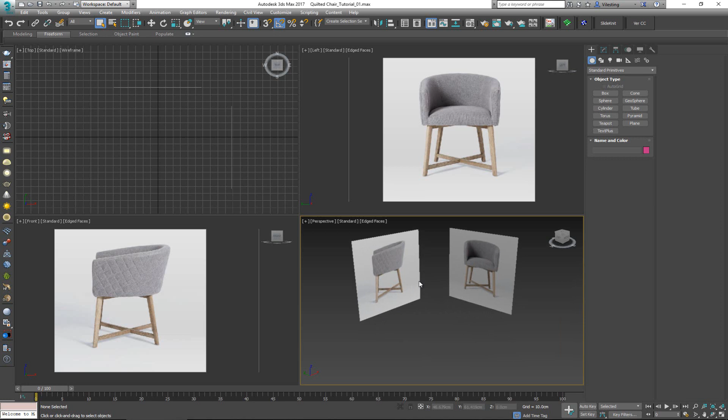So other than these images, the only other piece of info that I have is the width, depth, and height for this chair, and at what height the seat should be. So since I know that, I've created this box, and in this box I have the length, which is 58 centimeters, the width is 63 centimeters, and the height at 79 centimeters. And also, as you can see, I have this line in here, and that line was added with the Edit Poly. I just put a line at the height of 50 centimeters, and that's the height for the seat.

So now, if I make this see-through, I can see that more or less it kind of goes around the whole chair, but we have this little bit of the chair going through the bottom and kind of sticking out. And also, this is the height for the chair where it's supposed to be, and here I can see that, well, this is not where it starts. So what we have to do here is take into account that there will be some perspective distortion for it.

All right, so now let's start by modeling the most prominent piece for this chair, and that is going to be the backrest. So for this, I'm going to start from the front viewport. First thing I'm going to do is hide my box, the bounding box for this thing. Go in here, make a plane that is going to cover up this edge right here. All right, something like this. Now I'm going to press Alt-X to make this thing see-through again. Get this thing down to like 1 and 1.

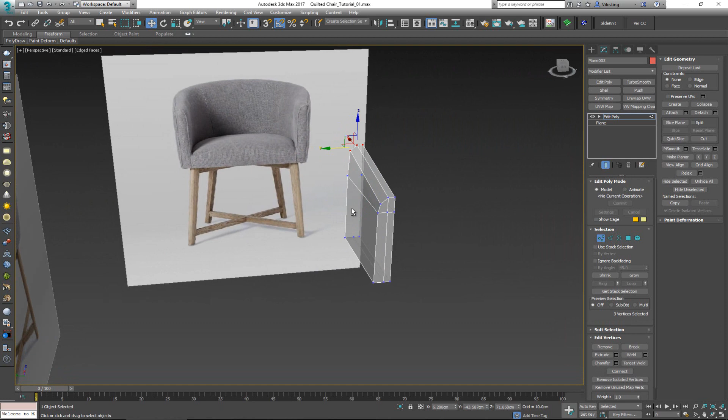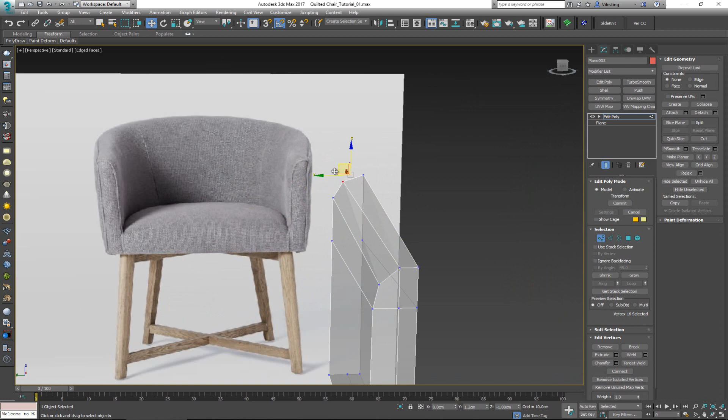Also, another thing that I want to make sure that I fix while I'm at this point is that I can notice that the chair around here has this turn, but as it comes to the chair over here, it's very, very round. So it no longer has that dip. So what I can do in order to get away from that dip is just move this thing a bit down, move this thing around here. So now it's a more round look.

Now, the next thing I want to do is take one more extrusion here. So hold down Shift, pull it all the way back till about here, like so. And now, once I'm here, I want to rotate this for 90 degrees. So 90 degrees like so. And in the left viewport, move it all the way up to the center, something like here.

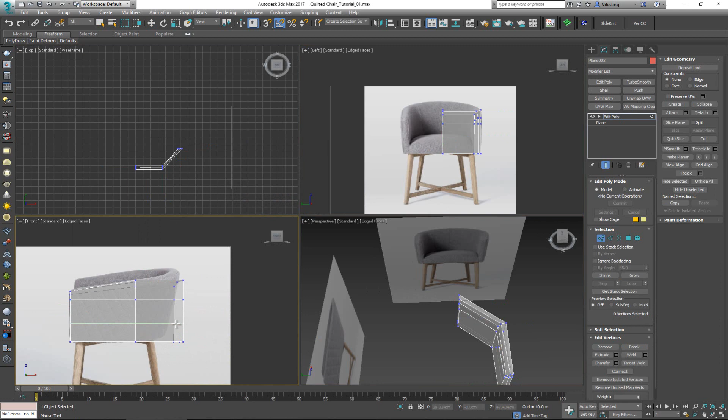All right, great. Now, with this thing moved there, what I want to do is I'm gonna go in, put in one more line over here, just to help me with that shape. Move this thing upwards like so. Move this thing inwards, just so we get that dip, or try at least to follow it as close as possible like that.

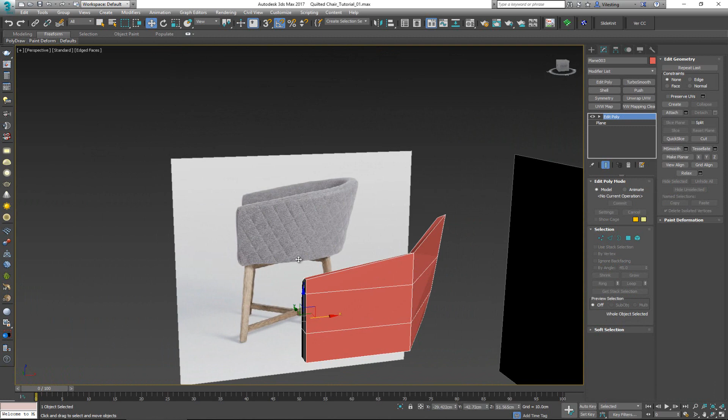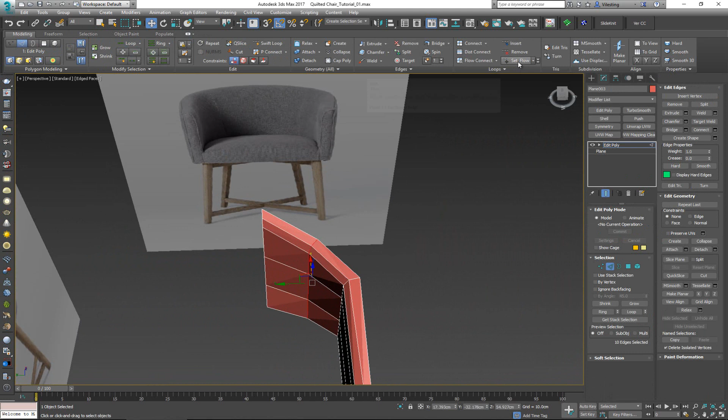Awesome. Now, I have this very sharp turn, so in order to make it less of a sharp turn, I'm going to use the Swift Loop again, and this time around I'm going to hold down Shift, so click, and this is going to put one line in here in the middle that is going to be in between both of these edges, and it's going to have the set flow applied to it because I was holding down Shift.

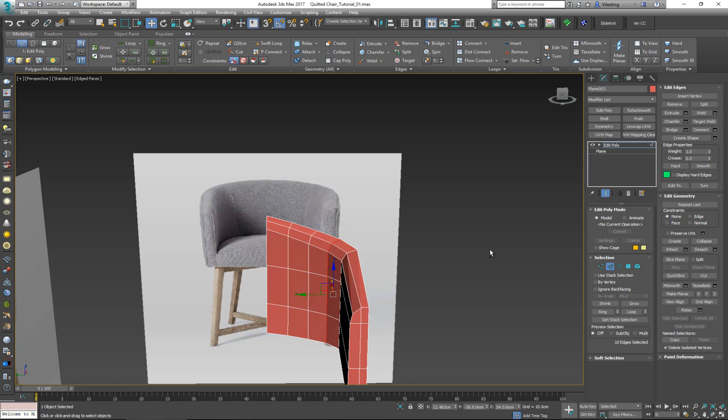So again, I'm going to put in a few more SwiftLoops, so you can either click here or my shortcut. So one more here and one more there. So now I'm getting this turn, which is more or less what I want to have for this chair. But from what I can see, I think it's a bit too steep, but we'll see in a second.

Before I do that, I want to make sure that I'm only working on half of this. So I want to take my pivot and snap it over here. So now when I put symmetry, it's going to mirror this thing on the other side as well. All right, so this thing looks okay.

So let's unhide all and see if this thing is really in the middle. And from what I can see, I've been really close. Oh, actually, I've been perfectly snapped in the middle. That's awesome. All right, so hide this again. And now let's do a bit of a fix up on this thing, because from here I can see that this thing is supposed to follow this curve, more or less something like this.

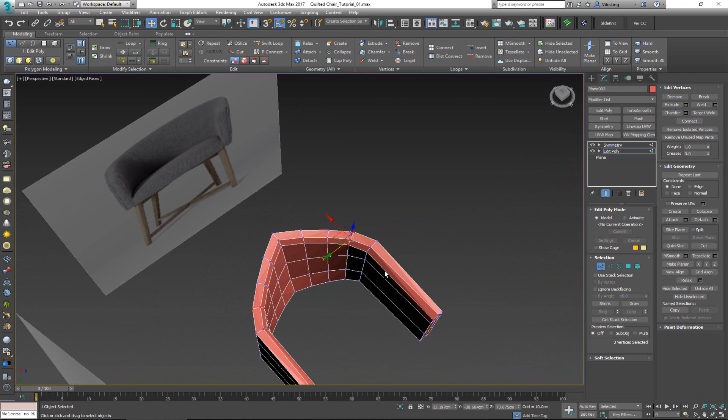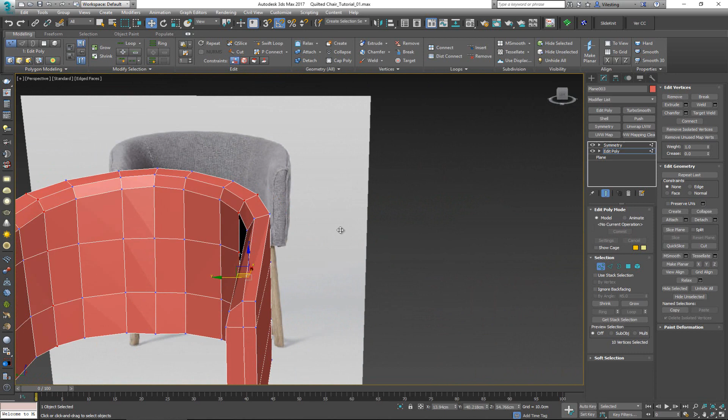And more importantly, while I'm at this step before I start adding in any more geometry, I want to make sure that here this turn is not this steep. So I just want to move this thing to the back a bit until I get a more gradual turn or a more natural turn. Something like so. If we had a blueprint, we wouldn't have to do this by eye, but in this case we just have to wing it as closely as possible.

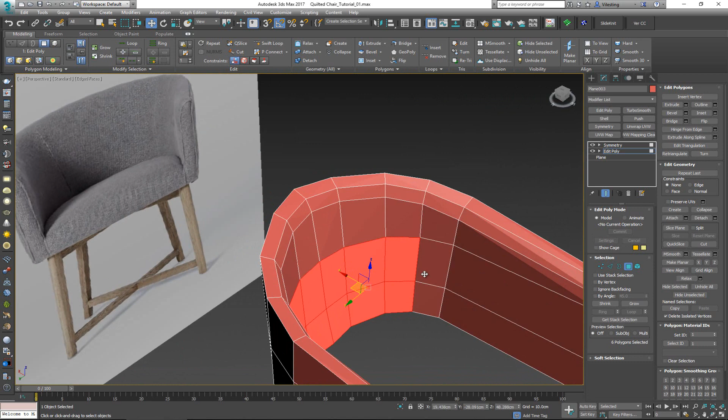And the next thing that we want to do is, I can see in this chair that this portion where the back is going to rest is not as thick as this portion. So this means that as soon as it starts getting into this turn, this thing has a bit more thickness to it. So in order to get that thickness back, what I can do is select all of these polygons, move them up a bit like so. So now after we put in TurboSmooth, we should get that edge to look better.

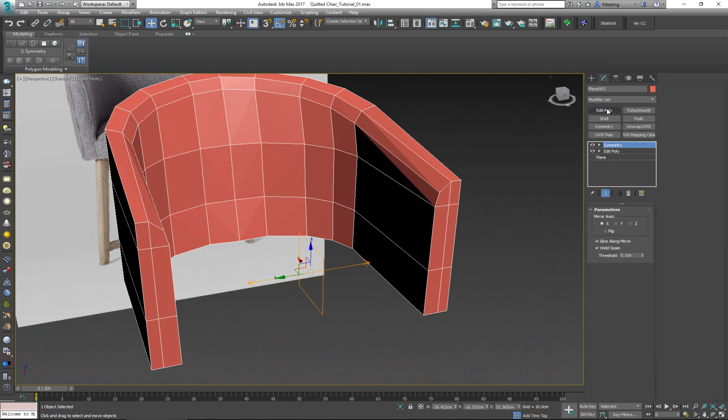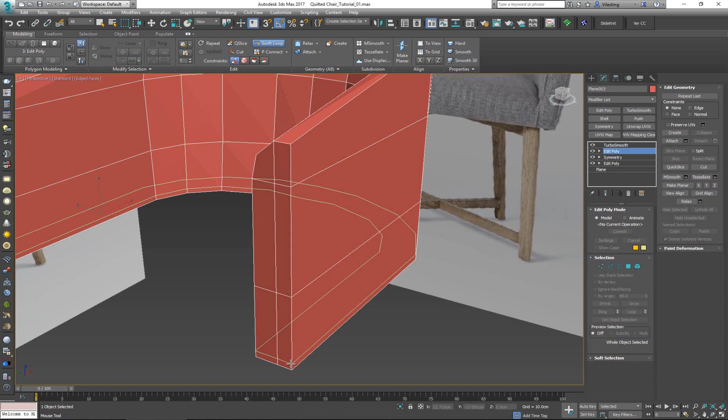All right, so with this done, let's continue adding in more details. To get this nice look, I'm gonna go and put an Edit Poly on top of this here, and I'm gonna put a TurboSmooth on top of everything else, so something like this. As we can see now, it's smooth, but it's really having problems holding these edges. So before we go to the TurboSmooth, I want to go down here while I'm in Edit Poly, put one edge at the bottom, like so, put one over here, and I can even try to put in one at the edge over here, but let's see without it how it looks like.

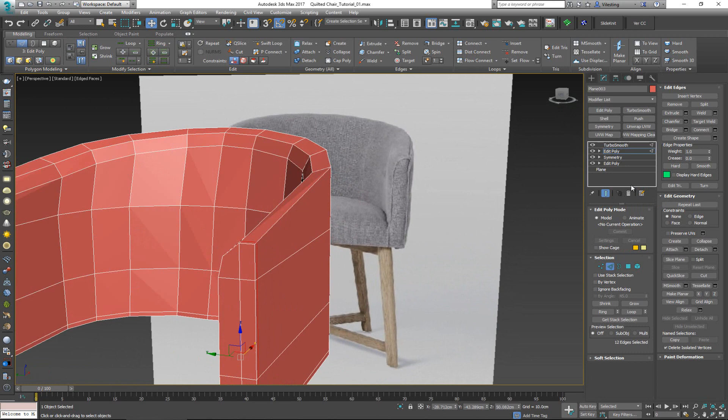And from what I can see, even without adding in that final edge that's supposed to be holding this side, like so, and making this thing a lot sharper, I'm okay with how this thing looks like. Now, since, again, I don't want to have to work on both sides, I'm going to put another Symmetry on top of this, and all the edges I put in here, we can see them here. So now when I turn on the TurboSmooth, I get this thing to have this shape.

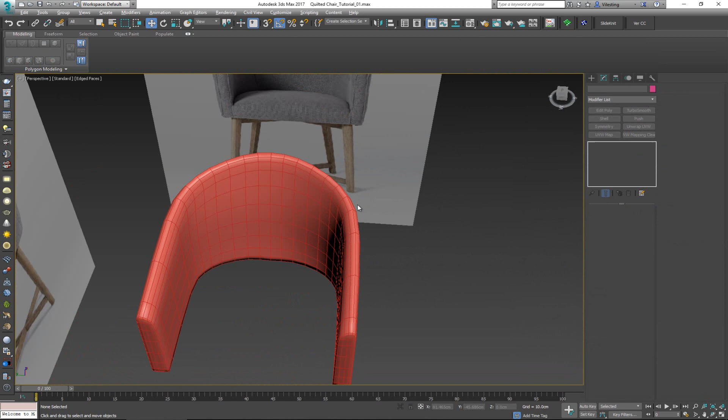Again, I think I can probably go in here and just slightly, and I do mean slightly, move this thing to the back a bit. There we go. Turn on the Turbo Smooth. Okay. Move this thing off here, up there. All right, so with the Turbo Smooth now, we should get that look where it's more declined in the front, and then it's going to a more rounded look here. And this is with the iteration at 1. I'm going to try and keep it low because I want to add in more refinement later on. But before I do that, I need to add in some more details in here.

So now, let's take care of the piping for this thing. As I can see, I have that piping going all across the front and at the edge of this chair, which is basically where the quilting starts. So as you can see, this piping is more like a border between what you're having for the chair as a material and what you have for the quilting. So let's go ahead and define that line. What I'm going to do for that is on top of the Turbo Smooth, I'm going to put yet another Edit Poly.

Select all the edges where I'm going to have piping, but now since this is red and every time I'm selecting something it's red, it's really crappy for visuals. I'm going to change the color for this thing to something like blue. There you go. So now select all the edges where I'm going to see that piping, and as I can see in my image over here, that piping goes all the way around here and comes back around here and goes on the outer side of this chair. All right, so that's awesome.

But actually, I just noticed something. Before I go in and start adding in a lot more details, while I'm still at fairly low density for my geometry, I want to make sure that in here or somewhere around here I have this line going across something like in this manner. So when we start modeling all the rest of the details, for this line we don't have to add in an extra Edit Poly, but instead we can follow one of the edges that we already have. So for this, I'm going to put on my edge constraint here and try to move these guys in slightly until they're following that line that I want.

So as you can see, I'm not screwing around with the geometry or the shape for the chair, but let's see, if I move those, I'm going to screw with the chair. So I'm trying to just move the vertices and still keep the same shape. There we go. I can probably move this thing without the edge constraint.

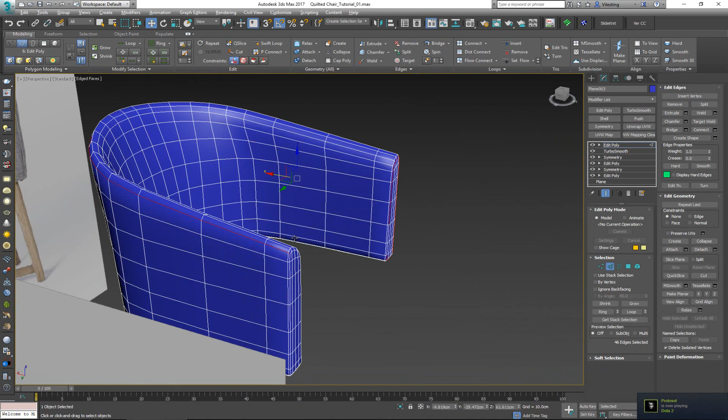So all across here at the bottom, and go over here on the outer side, select this line. It's going to go across the whole thing, so don't worry about it, just work on one side. And now the piping, if we take a closer look at it, we can see here that we have this natural dip for it, and then we have the actual piping. So first we want to do is encompass that dip for the geometry.

So with the edges selected, we're going to go and extrude this thing inwards. So a width of, let's try something like 0.1 and a dip of, whoa, this is way too much. So something like, I don't know, maybe minus 0.2 centimeters would do fine. Or we can try even something lower. Just make sure it's not folding on itself, so it's not going to create any problems. So something like this is fine. All right, there we go. So now if I zoom in here, that's actually okay, not too many problems.

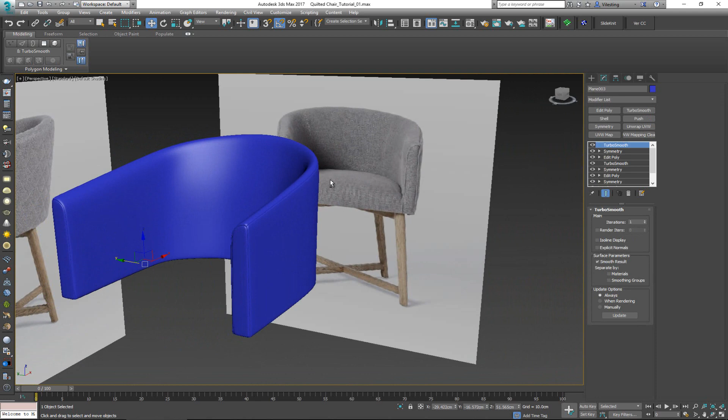And again, since we were only working on one side, I want to put a symmetry on it. In this case, make sure the symmetry is not welding, or the threshold for the symmetry is not too big, just a very small symmetry threshold. Otherwise, it might weld the cuts in here. So now when we put another TurboSmooth on top of this, we're going to have this nicely defined dip where that piping is supposed to go.

So once we have both of those TurboSmooths on with one iteration, what I'm going to do here again is put another Edit Poly. And this Edit Poly is only going to be used so I can select the actual piping that we just did. So now, let's see, this is the problem that I was talking about. Something went wrong, and now I have to go back, and there we go, exactly. While I was doing the extrusion, I'm guessing somehow I managed to deselect some of the edges. So now I have to fix this issue.

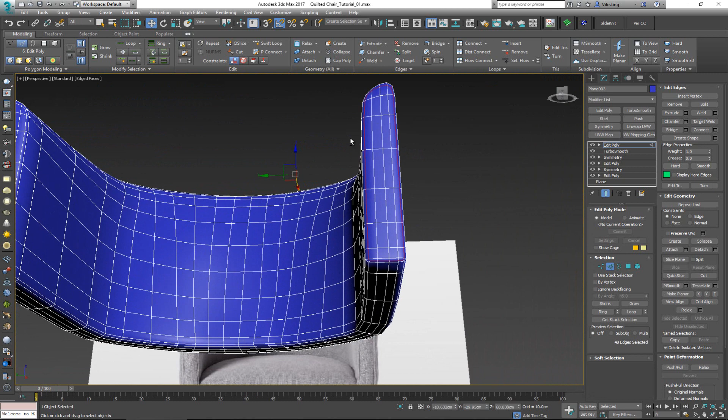So there we go. Extrude. All right, well, at least now you're going to know how to fix this, and whenever you're modeling stuff like this, it's normal that stuff like this is going to happen. So in case you have something like that, just go back, Control Z, do the same thing again. So minus 0.23 width 0.1, click OK. That is fine. And again, symmetry with a very small threshold, and another TurboSmooth. And now we're back at where we were, just without that problematic place in there.

All right, great. Now, next thing I want to do, as I was doing it previously, put another Edit Poly, select this line, like so. If everything is right, it's going to go all the way, so you're going to have a proper edge loop. Double click on this line. It's going to go all the way across on this side. So we can select this edge as well.

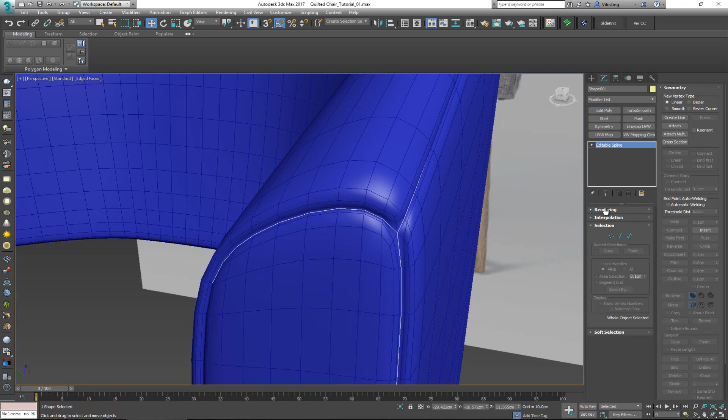And with this, now what we can do is create a shape. Make it a linear, or we can make it a smooth one. In this case, anything is going to work, but I'm actually going to go with linear, because we're going to have enough geometry in here. And I want to go into Rendering, Enable In Renderer, Enable In Viewport. Make sure the thickness is the right size, so it kind of fills in the place here.

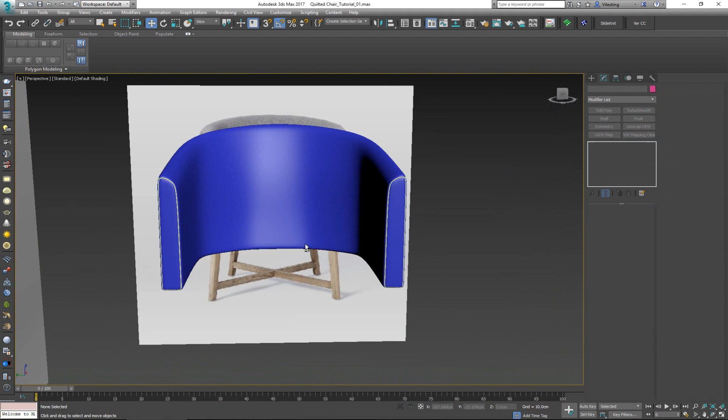And there we go, we have piping for this thing. We can control how this is going to look by moving these vertices, as you can see right here. There you go. If we have some problems, we can later turn on Turbo Smooth and get a much smoother result like that.

All right, so once we have this, let's continue on with the more complex part of this chair, and that is adding in the detailing, which is adding this line. I don't think we have to go in this far, we can probably go back to this level and just add in this cut. So let's go down to this part here.

I actually no longer need this edit poly, so I'm going to delete it. I only used that one so I could get the piping for this chair, which is okay.

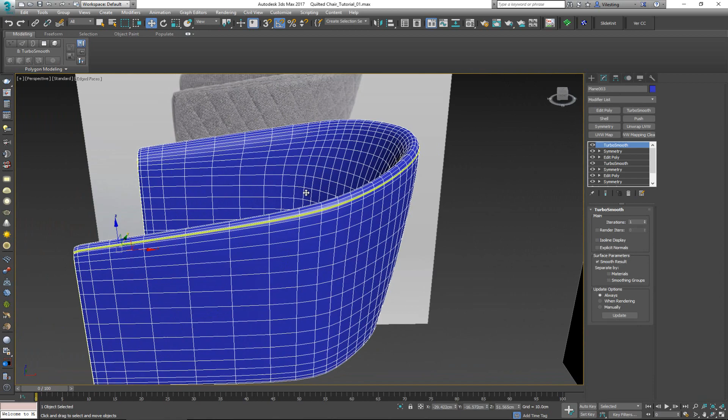So now what I'm going to do is get down to this edit poly and select one of the lines where I want to have that inward cut. In this case, I guess it's going to be probably somewhere around here, or maybe this line. Yeah, I think this line is going to be what I'm looking for.

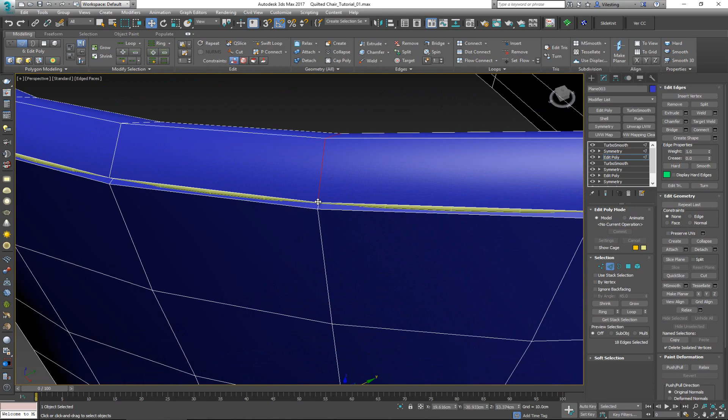So once I have this, I want to make sure I selected all the edges that are going to be relevant for that cut. In this case, I want it to go as far as this edge goes, until it gets to the point where it's inside the piping. For the bottom, it's probably going to go up until here, because we're going to have the cushion in this part, so it's not really going to be seen underneath here.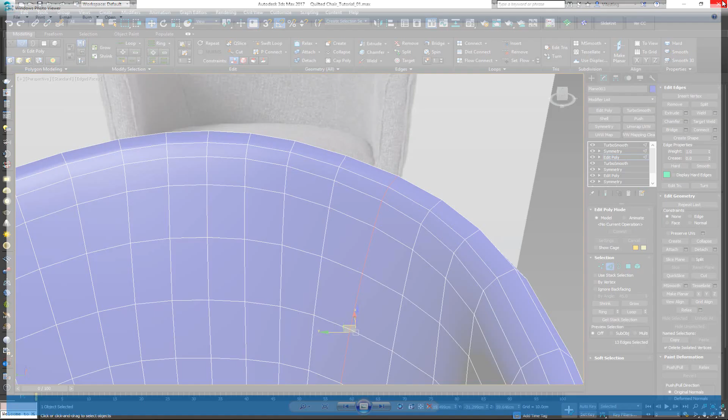So what I'm going to do is a chamfer for this, but let me show you something first. If you look at the actual cut for this chair, or the inward stitching, you'll notice we have this dip or inward extrusion, but before we get to it, we have this slight bump, kind of the place where the fabric is conjoined. So to get that, if we just add an inward extrusion, we're going to get that cut.

But just to make it a bit better, we have to contain that, so we can do that by doing a small chamfer, something like 0.1, and put one segment in here. Now select that same segment that we just created.

Again, just select all the places where it's going to be valid, like there. Actually going to deselect that, and that one. Let's try on the upper side as well. I want to have that thing go into there we go, both of those.

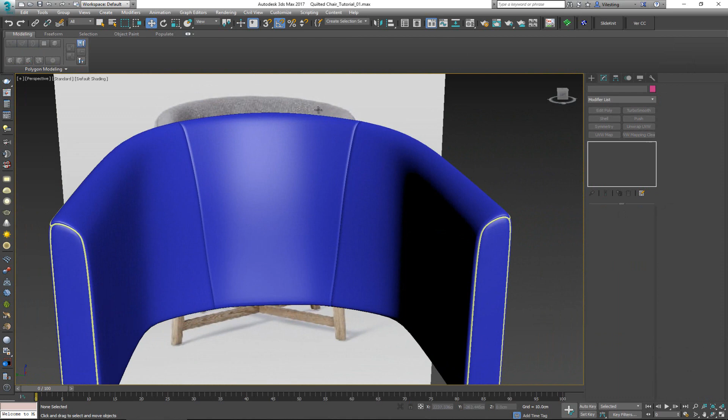So now I'm simply going to add in one little extrude, a very small extrusion. So now when we turn on everything, we should have this, but from what I can see it's a very sharp edge, so probably a bit smaller cut, like so. All right, awesome.

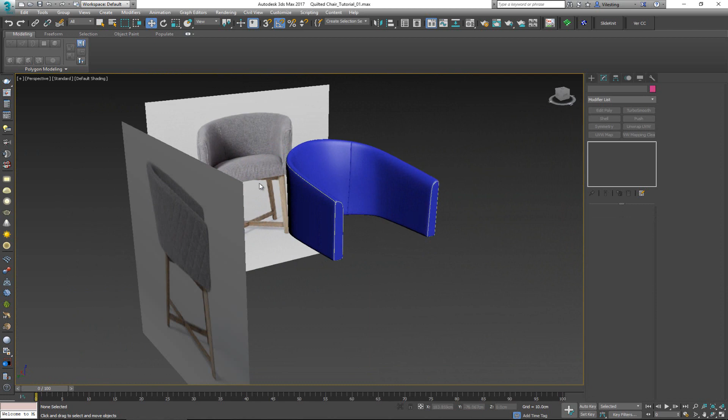Now with this, I have these two cuts. So next what we have to do is create the seat and then move on to the more complex quilting of this chair.